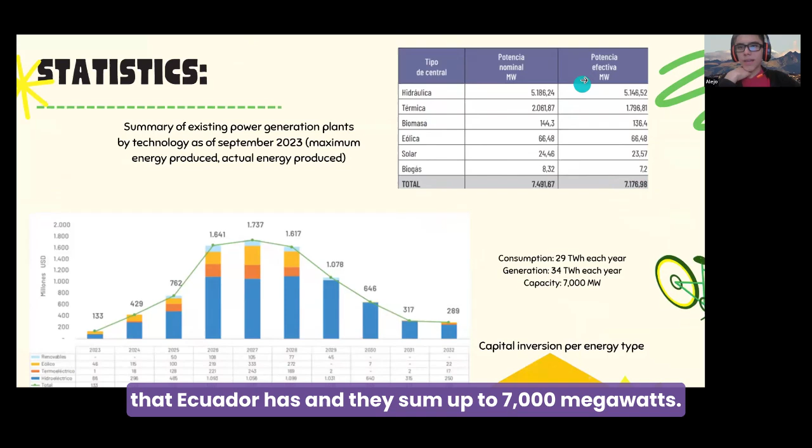In this chart, you can see the different energy sources that Ecuador has, and they sum up to 7,000 megawatts. And we generate 34 terawatt hours each year, but only consume 29 of those terawatt hours. And the government has been developing a plan since 2023 up to 10 years in the future.

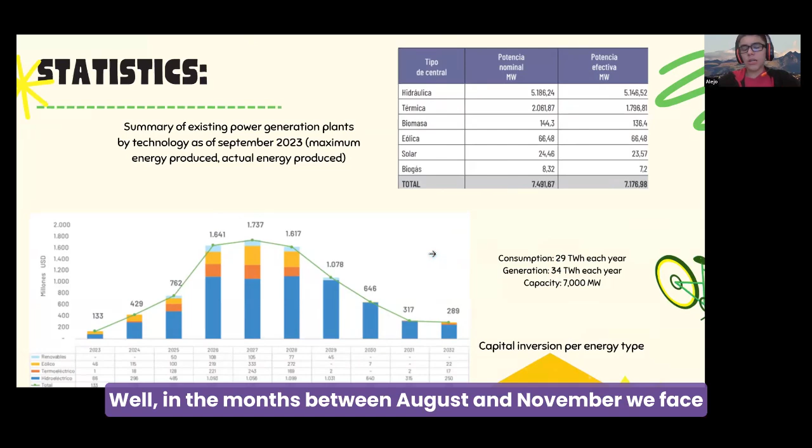With this, you will be asking, what is the problem here if we consume less than what we generate? Well, in the months between August and November, we face droughts that reduce the amount of water we have and hence also reduce the amount of energy we can produce. Let's go with the PESTLE analysis.

Our problem has many areas of knowledge and engineering connected to it, and in order to bring our best solution, it's crucial to understand these aspects. We start with public companies that have corruption inside their workings, affecting workers who quit and the projects at hand, with either too much money for no change at all or propositions that are never completed.

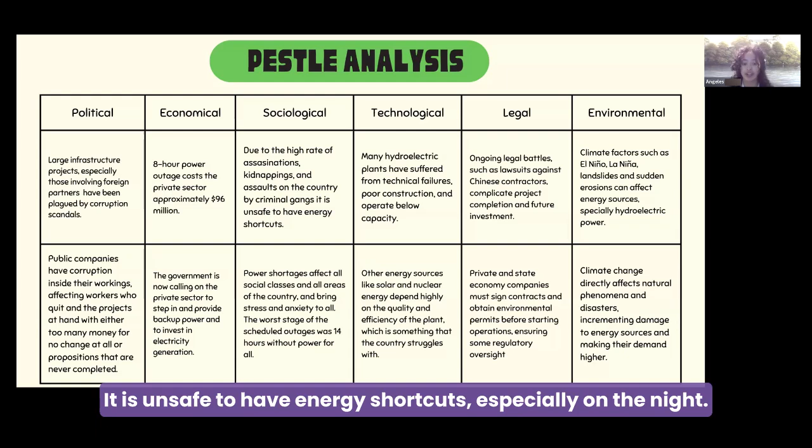Due to the high rate of assassinations, kidnappings, and assaults in the country by criminal gangs, it is unsafe to have energy shortcuts, especially at night. Many hydroelectrical plants have suffered from technical failures in construction and operate below capacity. And climate change directly affects natural phenomena and disasters, incrementing damage to energy sources and making the demand higher. Now that we understand what's going on, let's move on to our solution.

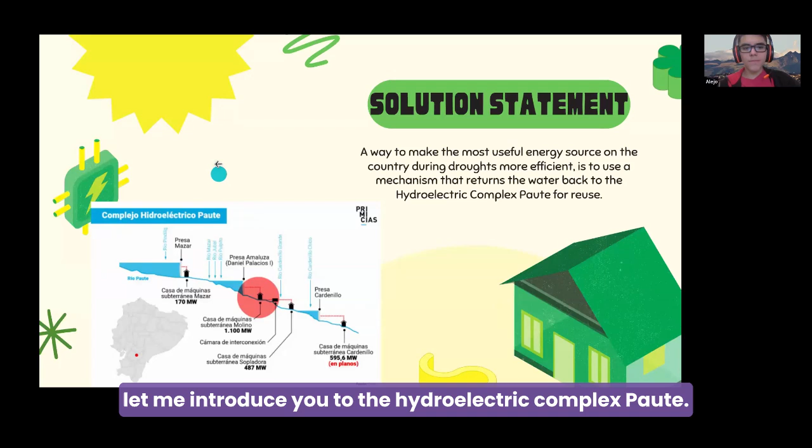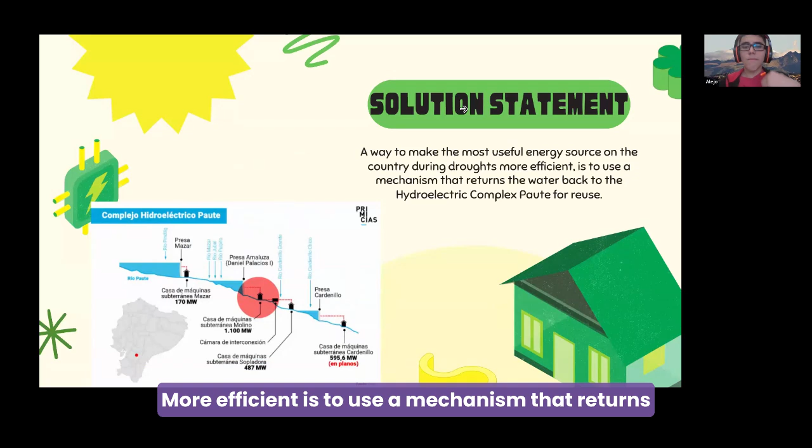Before going to the solution, let me introduce you to the hydroelectric complex Paute. This is where the prototype will take place, and that is because this complex is the one that generates the most electricity in Ecuador. It has 3 dams known as Mazar, Amaluza, and Sopladora, and there's a 4th one known as Cardenillo that's being built. A way to make the most useful energy source in the country, which is hydroelectric, more efficient during droughts is to use a mechanism that returns the water back to the hydroelectric complex for reuse.

The impact our project would have is that it would improve the stability of Ecuador's hydroelectrical energy, it would bring an efficient short-term solution until the government's long-term energy plan starts working, and it supports a more reliable, low-emission energy system. Now, let's see our final prototype.

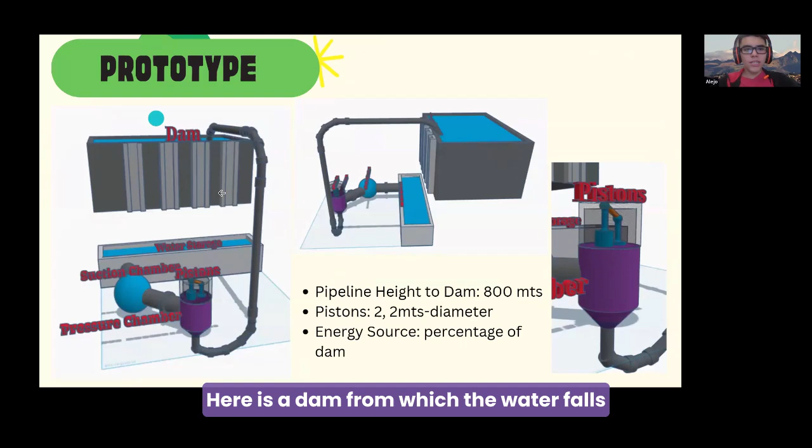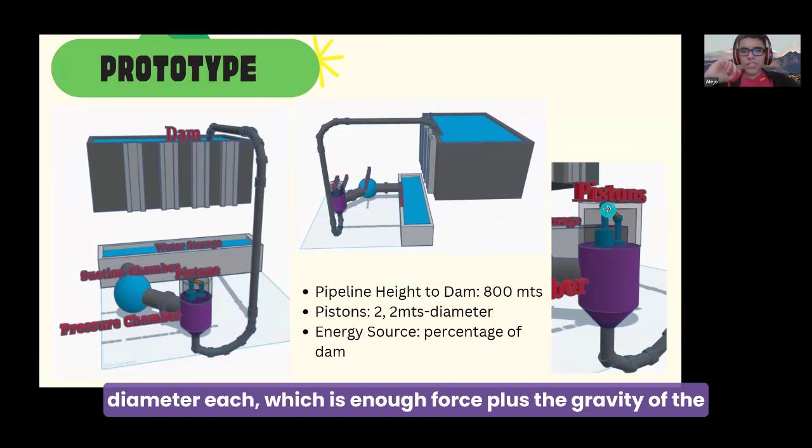Here are some images of the prototype we developed. Here is a dam from which the water falls and gets stored into this water storage pool. And this suction chamber pulls the water and puts it into this pressure chamber that has 2 pistons of 2 meters in diameter each, which is enough force plus the gravity of the fall here to make the water go up this pipeline back to the dam.

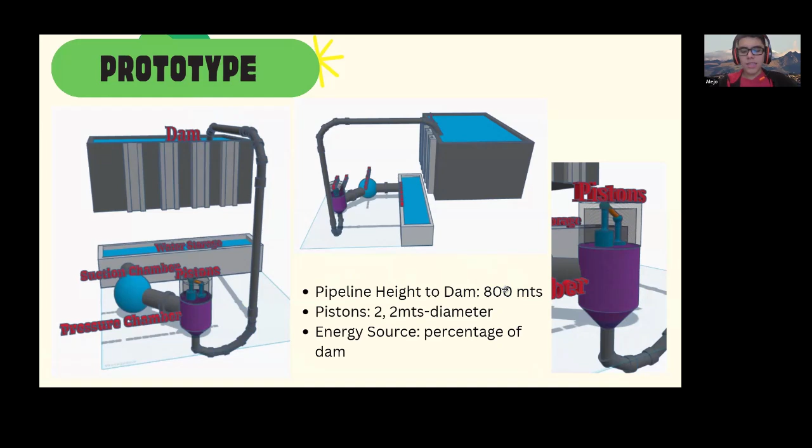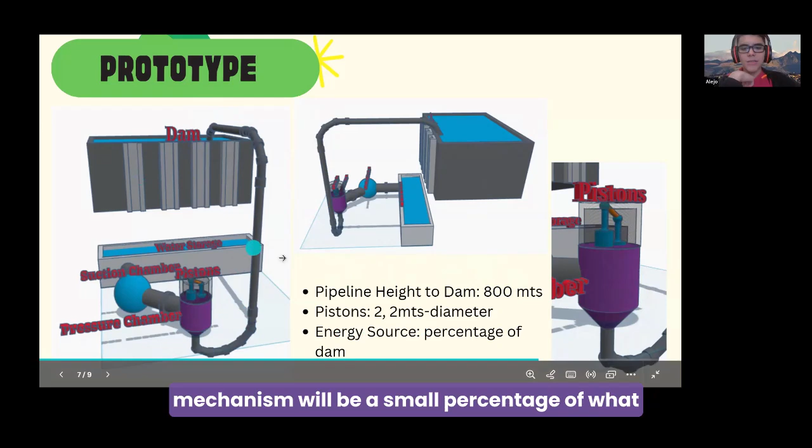The pipeline will be about 800 meters because that's the height of the hydroelectric complex Paute. And it won't actually be vertical but diagonal because of how the hydroelectric complex is laid out. And the energy source powering this mechanism will be a small percentage of what the dam produces in its first fall, which will probably be less than 1%, to power this machine.